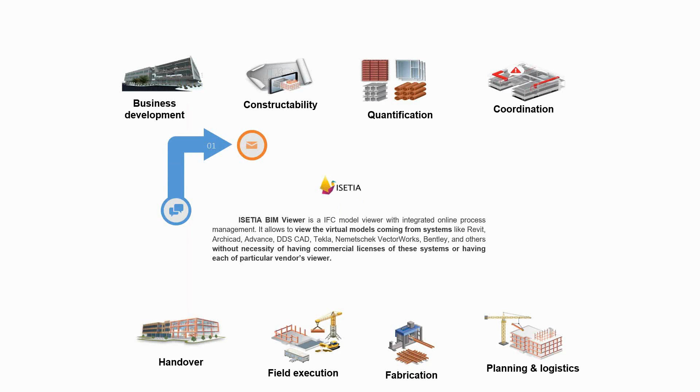One of the areas which is very fast developing in our industry is BIM. We are not a design software, but we are a project management system. That's why one of the most important things in project management is collaboration and process management. We support design processes and construction planning processes. That's why today I would like to speak about BIM and our position, how we are supporting the BIM process.

BIM is not a software. The first thing I want to mention is that BIM is a set of processes. As you know, there is a long journey for project execution, starting from business development and constructability, quantifications, coordinations and planning logistics, and of course fabrications, field execution, and handover process. Of course this is repeating all the time.

If you consider design, build, operate, this is where we are with Isetia. First of all, we are a very strong project management platform, cloud-based, allowing our project stakeholders to plan their works, execute their projects, control their projects, and operate and maintain it. But in the design case, we would like to mention that we have BIM modules.

Majorly, our focus is just giving the client an open platform with the ability to open any IFC files, 3D files, and communicate on the 3D files. First is verification, understanding the 3D files, because today we believe 3D is a very fast growing technology, and not only the designer, but also who's going to execute, who's going to do procurement, who's going to coordinate the work, needs to understand the project structures and project details.

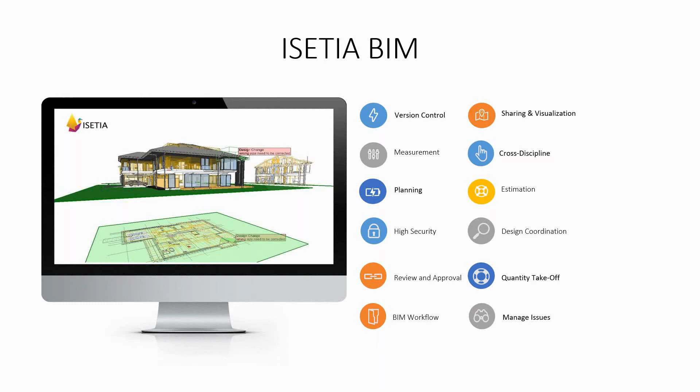The benefits of BIM - everybody's speaking about the benefits of BIM. This is already proven, and I don't think I need to repeat why BIM is important. Everyone listening to my presentation is aware of BIM's features, and many organizations have already started calling people BIM managers, BIM coordinators, and BIM is already an implemented process in many organizations.

With Isetia, we provide desktop applications for the BIM viewer, but we believe that today, without internet connection, web interface, or cloud solutions, coordination is very hard. So we give the possibility of working on the desktop while connecting to cloud systems and updating online. That's why we are very proud and flexible, providing the desktop and cloud-based solution at the same time, and you can upload and open the IFC file.

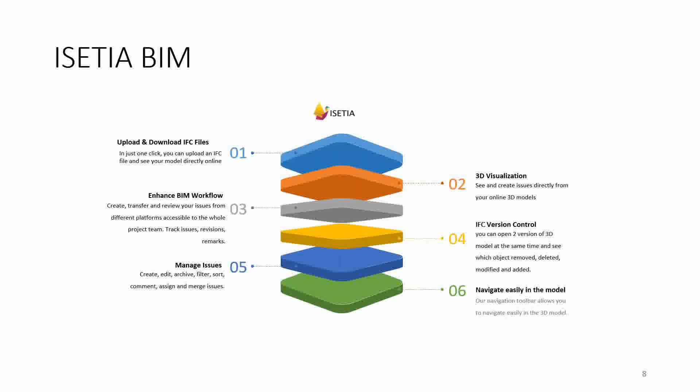Why do we give the desktop application? There are technologies available like web-based 3D viewers, but the projects we work on are very big and large, requiring big data for navigating. Unfortunately, web technology today is not strong enough, or internet connection is not good enough to cover the performance the client expects. That's why we allow the user to navigate on desktop, but at the same time collaborate on the web in the cloud. This is our way of doing it.

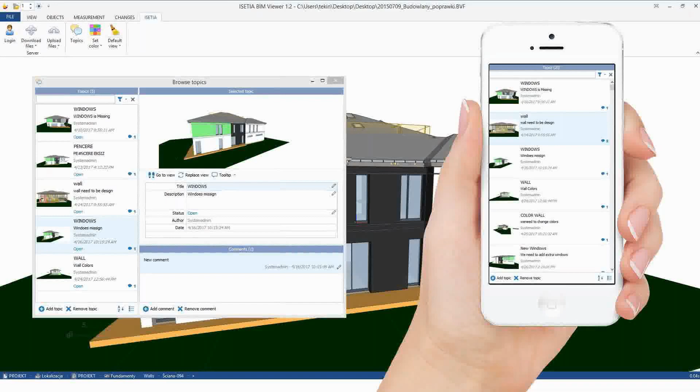In a moment I will do a live demo showing how I can create, for example, design issues. By the way, today we are speaking about design, but our support is not only for design in the BIM process - we do the same for construction and handover. From the 3D model, we give the possibility for coordination.

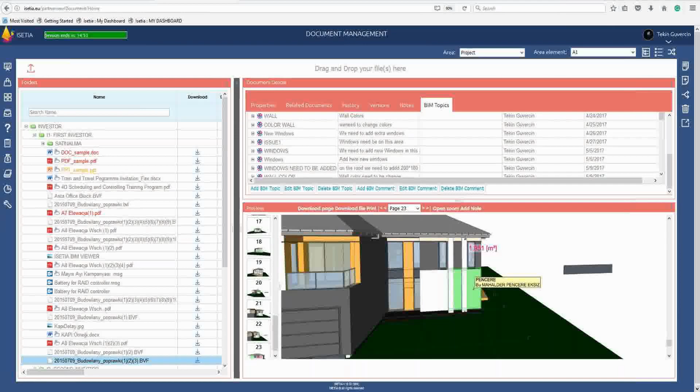This is our simple interface, and our major goal is not only giving IFC or 3D viewers - we also support any kind of documents, like Word, Excel, AutoCAD, PowerPoint, or pictures, etc. We have our own inbuilt document viewer, where the document is part of the task, part of risk processes, RFIs, and transmittals, with a very strong online markup capability. Users can navigate and open documents without changing the originals, add comments, notes, and markups, with very strong version controlling and history tracking.

We are very proud that our system supports BIM processes, but we also give clients PMI-based or agile-based methodology for project management, because we are not dedicated to one area. We would like our customers to be able to choose their methodology, so our software adapts to their way of working. That's why we are an open platform supporting any kind of methodology.

We aim to give our customers the opportunity to integrate all kinds of project processes, starting from business plan development, portfolio management, project task planning, work assignments, and processes like transmittals, submittals, and deliverables, which are important for project execution. And of course, measuring and recording risk, and lesson learned management for cost controlling.

We have very wide functionalities and areas, but I'd like to mention that in a moment, this is my last slide, and then I'm going to present a live demo. Our solution is implemented successfully and used for many mega projects by worldwide known construction companies, project owners, and design companies. We are open to developing our system in innovative ways, with support for mobile applications and web applications.

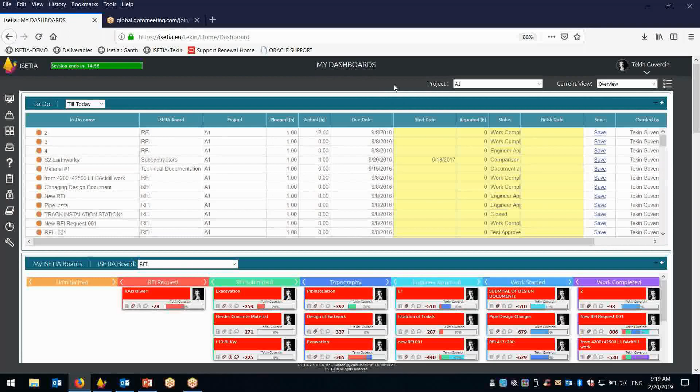We support multiple projects for portfolio purposes, so I can choose my project. Here I can see my project tasks, my project processes like RFI, transmittals, design reviews, and my tasks related to work, my risks, my issues, and documents waiting for my approval, document workflows which I created. You can also see project schedules and dashboards.

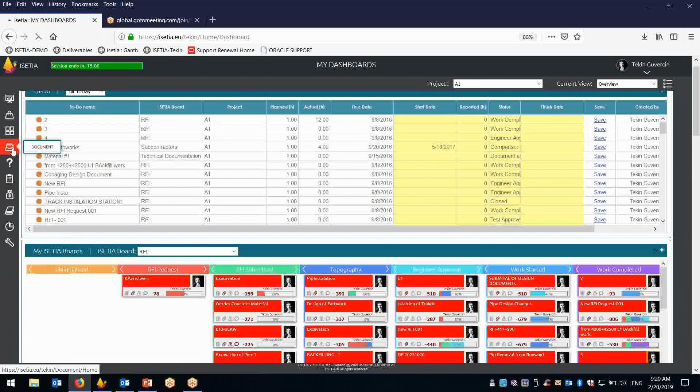On the left side we have our project modules. Today I'd like to focus on project BIM communications. As Tekin, when I selected my project called A1, I'm seeing here the project documentation. If you select a different project, the system will load different project documentation, so we are a project-based system.

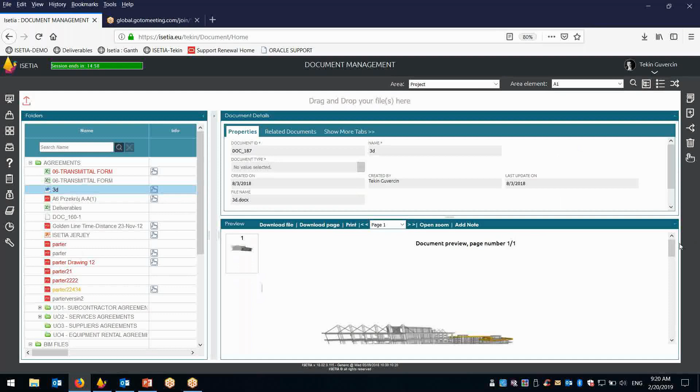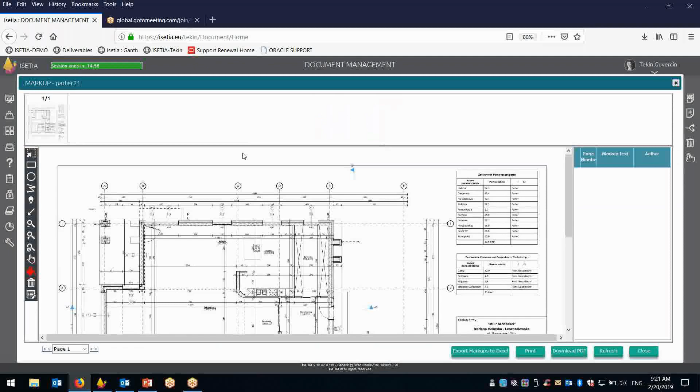Here you can open any kind of files - Word files, PDF files, AutoCAD files - and we provide an online viewer with markup possibilities. You can select the file here, and this is my file without original changes. You can make markups to edit the document. This is the classical method for 2D, and you can write notes like 'this area needs to be changed.' These markups can later be assigned to other people as a task.

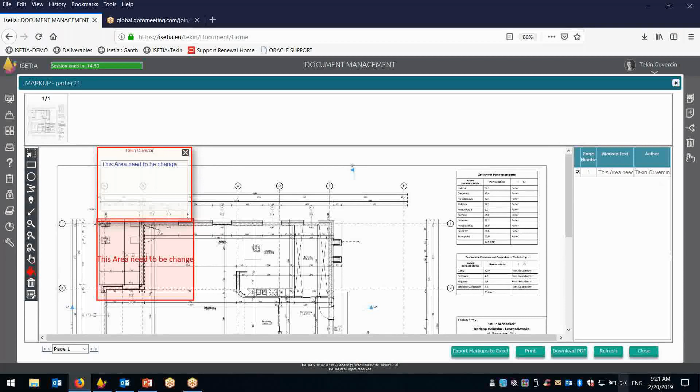When you close it without changing the original document, you can see the documents you selected. When you select the file again, you'll be able to see the markup you generated. I think I was doing markups somewhere here or here, so you can see that when you create a markup, it becomes available in the system.

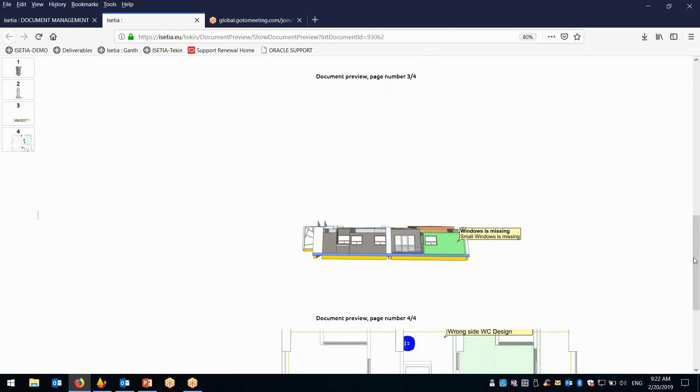But what I want to show is not the classical way - this is for BIM processes and 3D. This is the 3D file, an IFC file, which can be previewed or downloaded by the system. If you want to see bigger formats, you can see this is my project. Today I'll make samples, and you can see these are the areas where we have notes and issues. I'd like to present how we execute this process from the start. Of course, you can download the file.

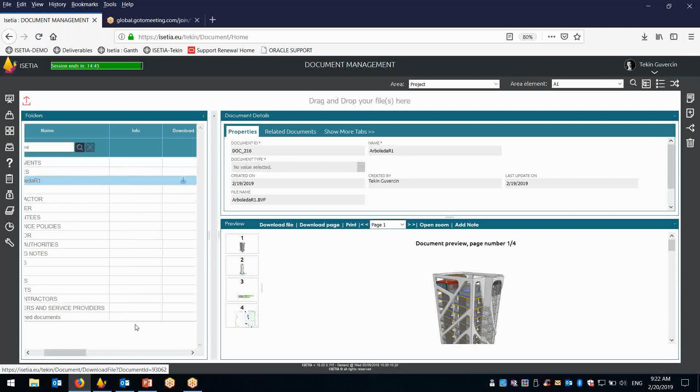We have complete version controlling, document check-in and check-out, so when you keep the original file on the cloud, any user can download it using check-in and check-out. When you select download, the file will open on your desktop with our BIM viewer - this is the project I'm going to execute today. One question: can you open the file only from the cloud? No, that's not needed.

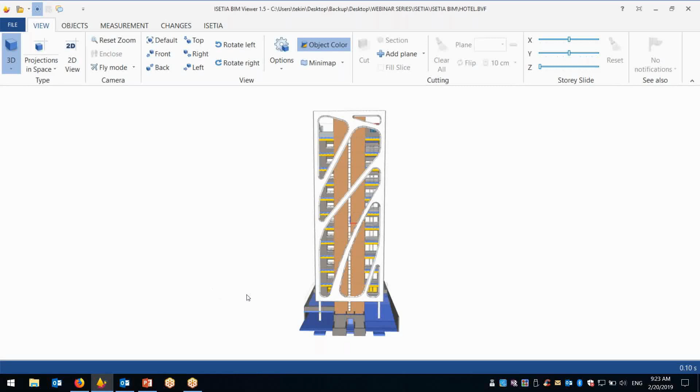You can directly open the 3D file from your desktop solutions, and then upload the file to the cloud, so that the file doesn't have to be located on the cloud as a start point.

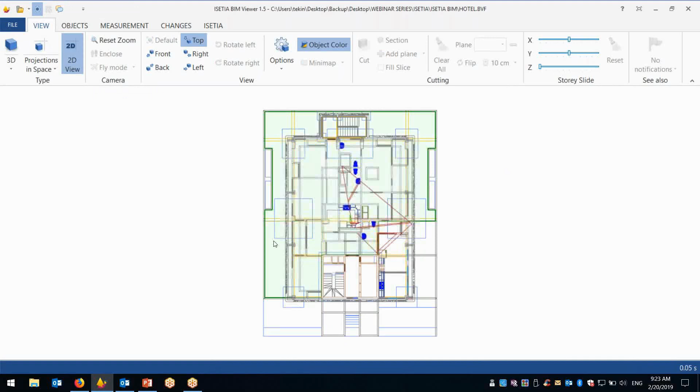This is the hotel project, which we are going to understand the navigation for today. When we open the project, we have possibilities to see it in 2 dimensions and also 3D. We can also make it, for example, for the projections with the bottom line, or we can make it left side.

You can see that we are able to see our project from the left side, or you can just select all. By this way, you can see the project from each side, how it looks. This is active too.

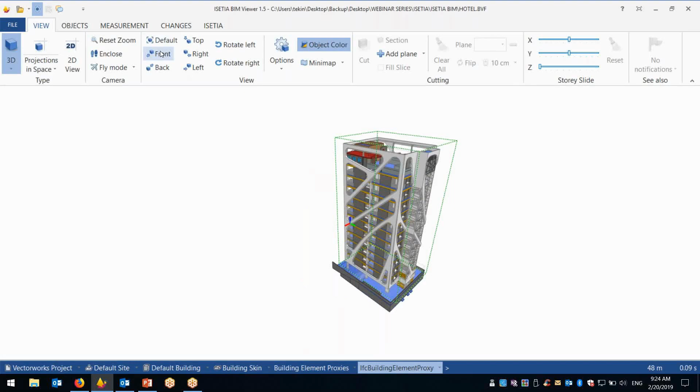You can also select the object, and you can see how it is selected in any area. We can also make it so that if you select it to view, you can see only the 2 views from the left side, right side, on the tops, and by this way you can just see the project.

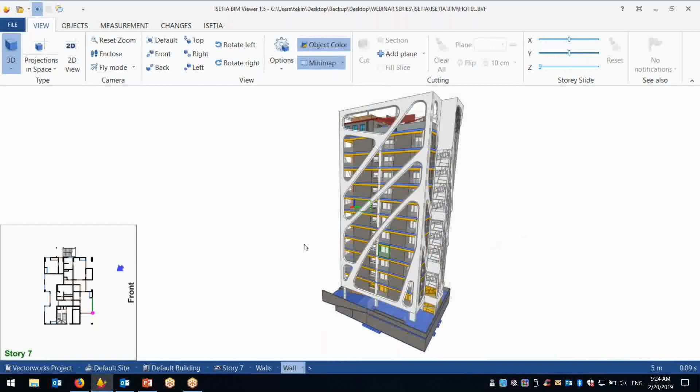Of course, if you open the minimap, you will also be seeing from which direction you are looking at your 3D, from the point of view, just showing the direction of the view, how it looks.

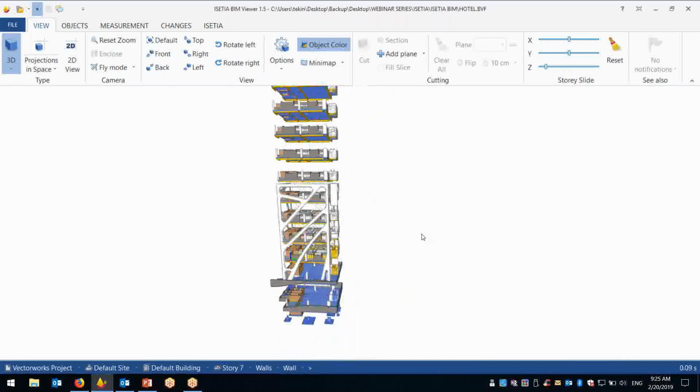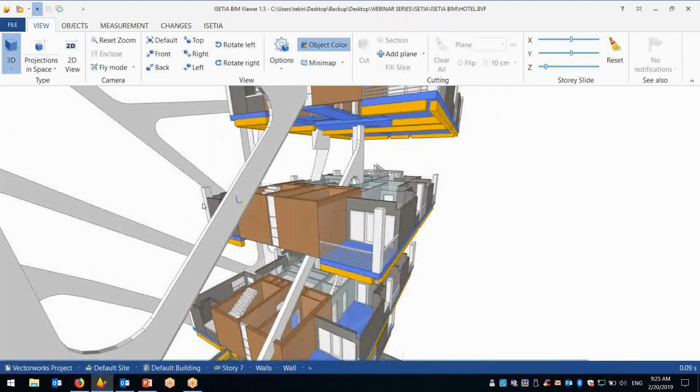One of the other possibilities is that you can also cut and slide your project. I just selected the slide by Z dimension, and you can also make it for the X dimension or Y dimension, so that you can split your project by layer for the floor levels, and it will allow you to check inside how it looks based on how the 3D is created.

You will be able to do it, and you can reset it. Of course, the colors can be changed easily.

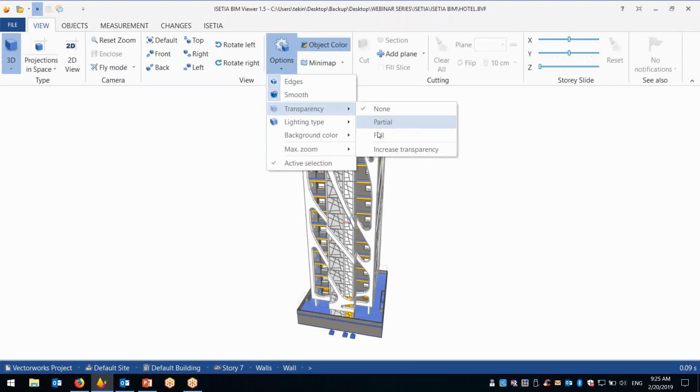You can just select the color changes, or you can go to options and make the transparent view, and you can also make it so the project is just showing the transparent view, how it looks like. It's really a powerful and graphically clear way of understanding the project.

You can select objects, and from here you will be able to select walls and all the selections, and it will help you easily understand and check manual clashes for the project.

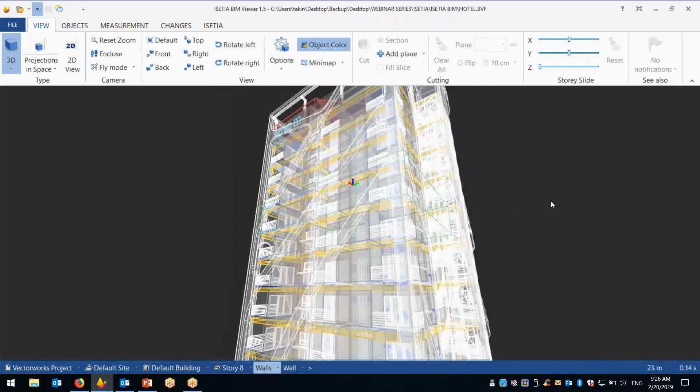Another thing is that if you don't like the white colors, you can also select the view and the color settings yourself, so that everybody can use their preferred colors from the system.

I generally like to have dark colors, so I just move to dark colors, and you can also use the other options here.

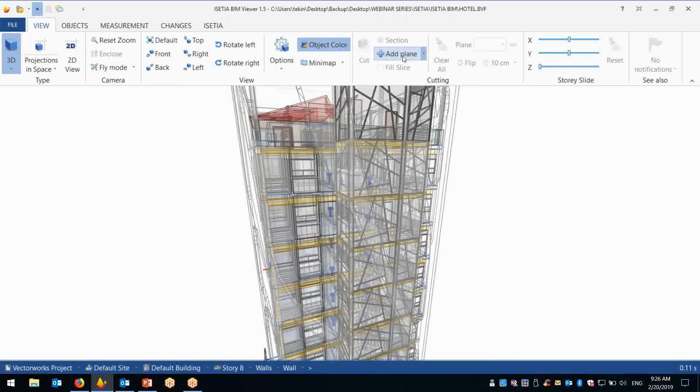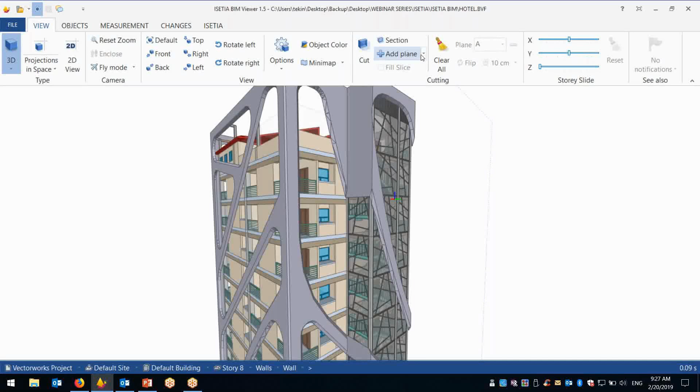One of the other possibilities is that you can cut the object from any area you wish, so you have the possibility of cutting the object from, for example, here I would like to select the cutting for the edge. You can select the objects, and you can cut it from one side.

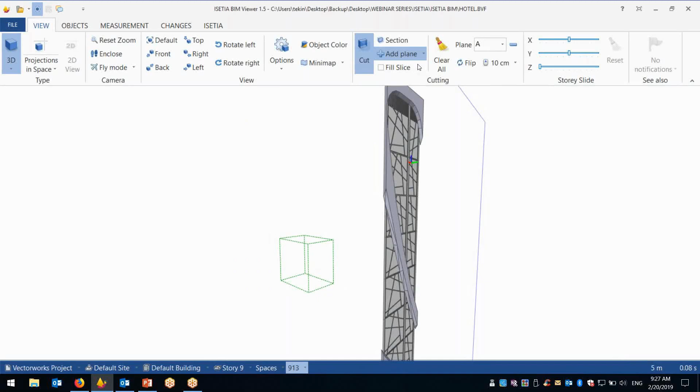Or you can make it, for example, here, cutting from the Y-axis or X-axis, or that kind of thing. It easily gives you understanding of your project's systems.

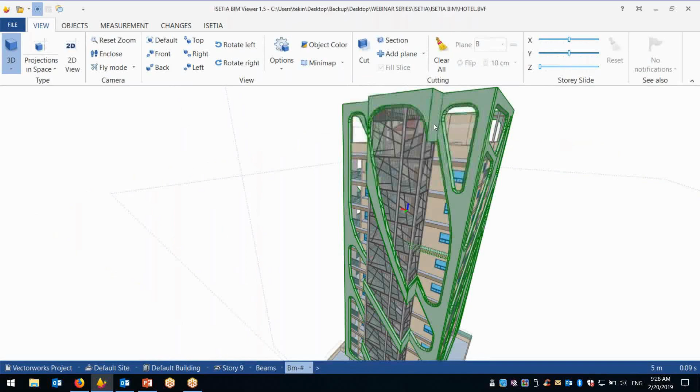Of course, we can send you a download link, and you can just select and cut the objects in any area which you would like to, and you can test it on your system. This is for easy navigation.

And what does it mean? Anybody on your projects can install the viewer free of charge, and by this way you can navigate it. We are not charging for this. We give our customers free of charge access, and after the webinars you can contact our regional managers, and we can provide a download link so you can immediately start using the system.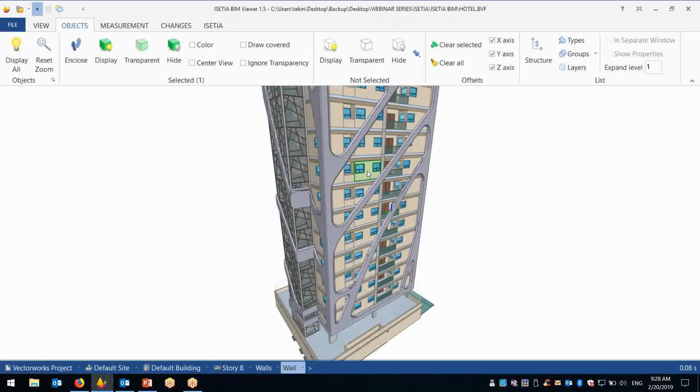We also have, in the standard functions, more navigation possibilities, which is that you can select the object and hide all the rest, and look at just the selected items.

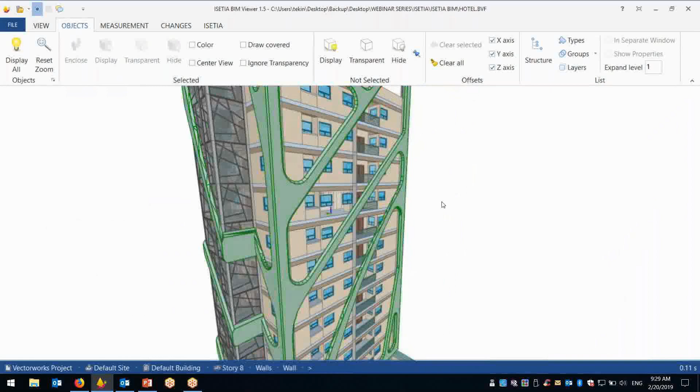Or you can select and hide the wall or display, or make a transparency for all the rest, so that you can see only the selected items. It's a really impressive way of understanding today's project with the extra dimensions.

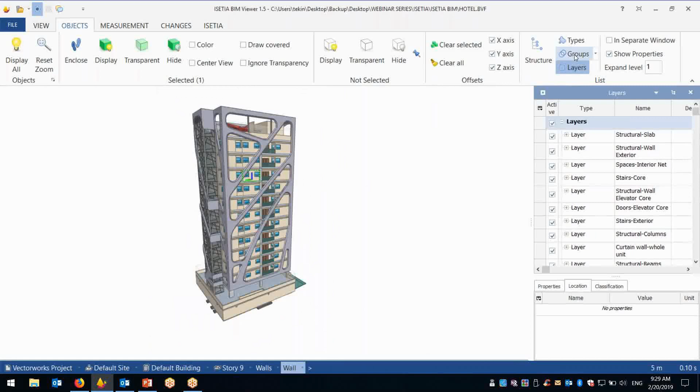And we can also open the project structures, which means that if you would like to see, for example, a group of works and type of works in the project, if you want to see only slabs, you can see the project slabs.

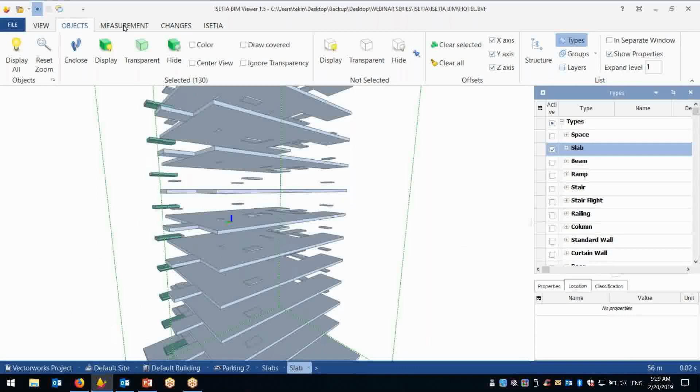Imagine that if you would like to make quantity calculation, just one click, I can tell you how much concrete is going to be in this project with the measurement modes. We can also select multiple lines, so these are the beams and slabs together. You can also make some clash checks to understand if anything is wrong, because when you put the columns, you can see the structures of the project, and from here you can understand how your project shell is going to be.

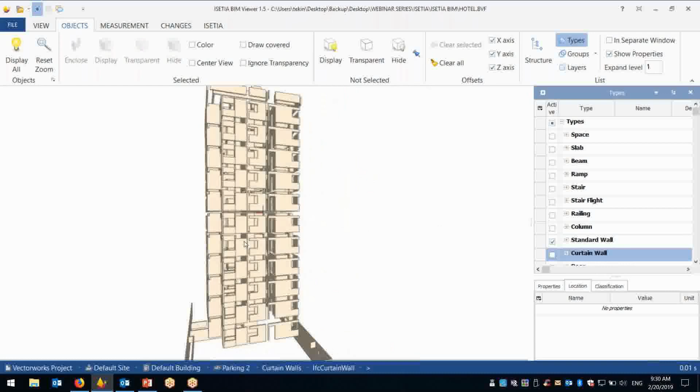You can just select any items, any floors, and if you selected all of them, it will be available for all of them. If you just want to select only the walls, the system will just show the walls and standard walls, etc. So you can easily navigate your project 3D file with our system.

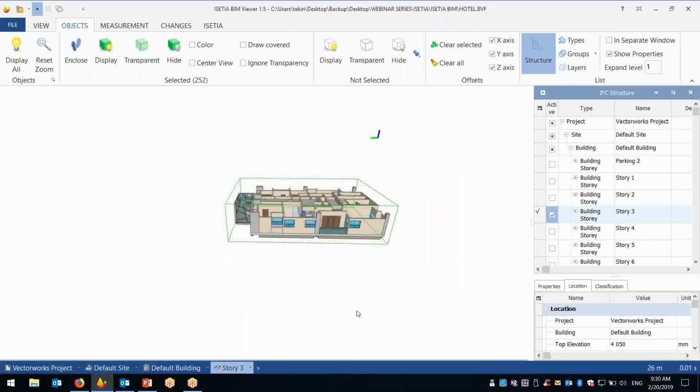Of course, for the structures, you can just select only the selected floors. This is the third floor, and you can open it and see how the third floor is going to be built. From here you can see how the 2D floor plan is going to look, or in the 3D you can just select it. If you want to select multiple floors, like the third floor and the sixth floor, you can see that it's also possible to make a comparison between the two floors.

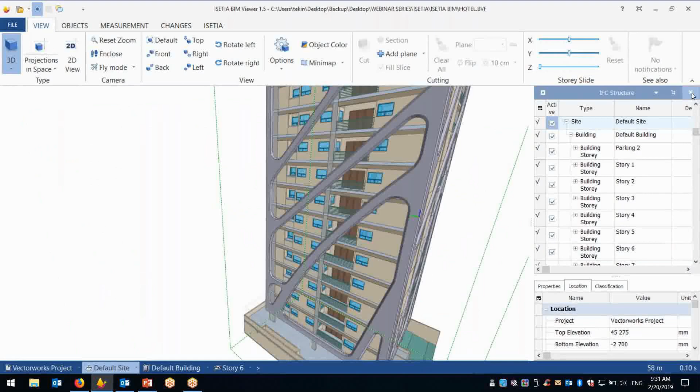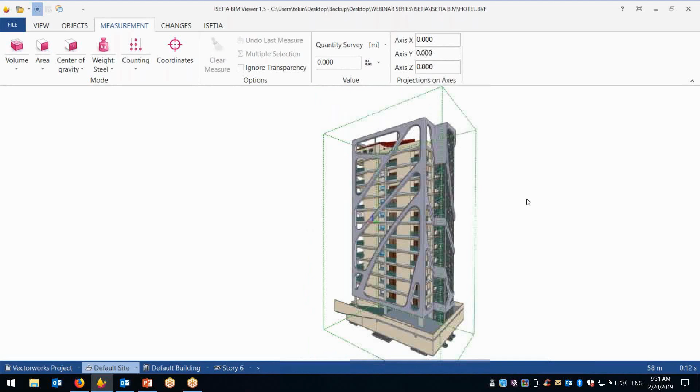All right, what is next? We also have the possibility of measurements. This is your 3D file, and your procurement manager, your cost estimator, your planners may need to estimate the work quantity, so you can use the 3D file for that.

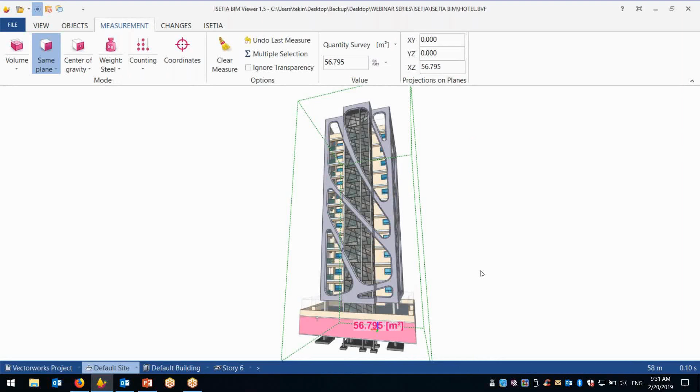For example, from the selection area, you can just select an object. You can see we are going to have 56 square meters of walls, or from this perspective, 62. Multiple selection is available, so using control you can select 56 plus this direction 118 plus this one and this one. The total wall is 160 in this area, and you can come back here, and when you select these areas also, the system will give the total, 257 square meters of wall work is here.

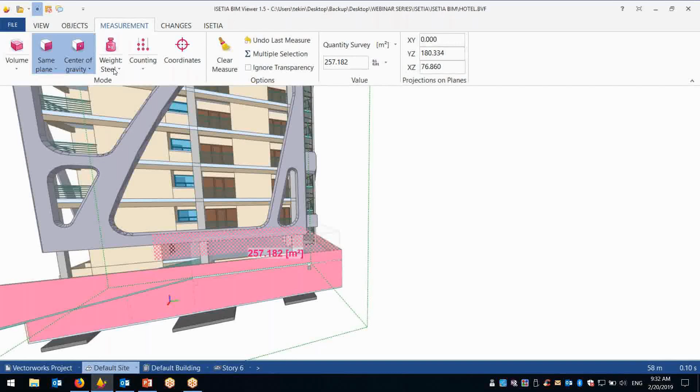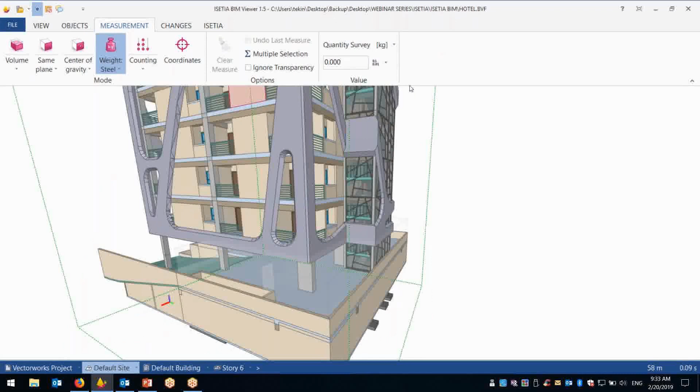Of course, you can count it, measure it, select it, for example across many areas. We have the possibility of selecting quantity of work for how much is required per cubic meter, for steel, and you will be able to figure out basic quantity estimation from the system. We are not fully specialized in quantity estimation, and there are professional software like CostOS and other systems, but we just want to give a basic understanding of the quantity of work through the system.

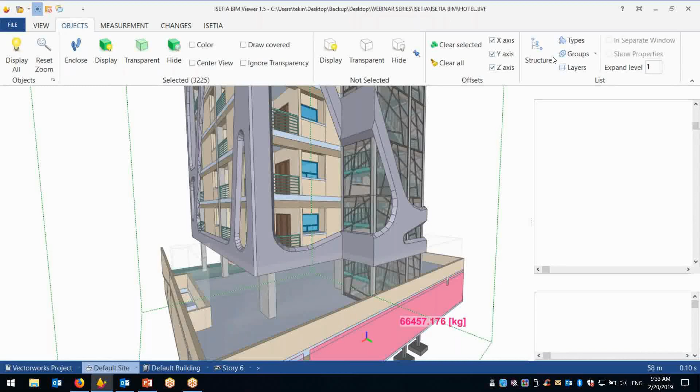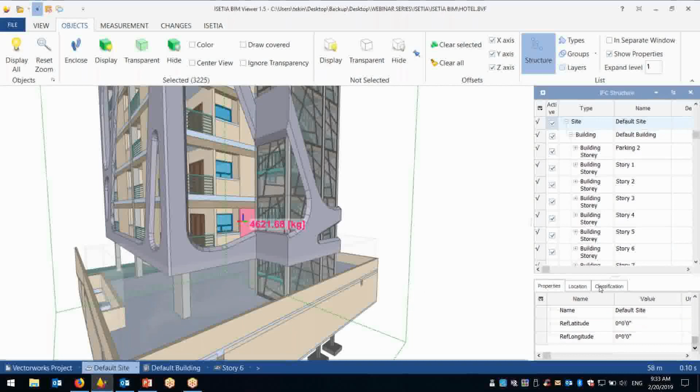Of course, the quality of the 3D is also important, because when you select an area, you can also see the properties of the work: the top elevation, bottom elevation, global top elevation, all the details of the work will be here. You can see this by selecting the work, so you have details of the quantities, properties. This is the element, this is the location, this is the classification — all the data is going to be available in our system.

What is design coordination? Actually, until now what I showed were simple BIM viewers, 3D viewers, IFC viewers. But our idea is that we would like to make design coordination possible by giving notes and remarks for the 3D. So what we need to do now — number one, you can see that in Isetia we are now connected to our cloud server, and I would like to create some topics.

I open the topics area. At the moment there is no remark and no topics, so I would like to create a new topic. Let's say we select this wall — this is the wall which I am going to select. And in this wall, first of all, you can just change the colors.

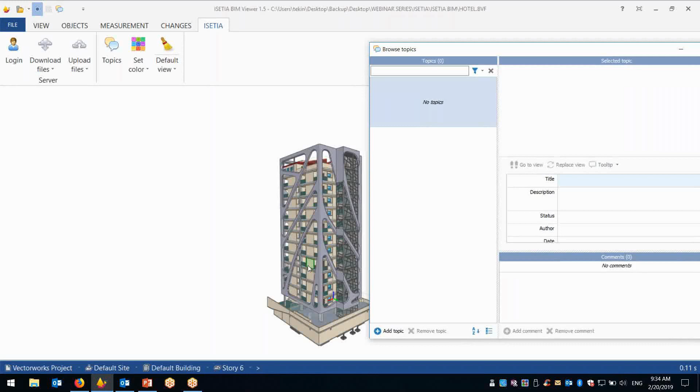Let's make it red — it will be visible. And I can create a topic on this selected object. You can see that the system immediately takes the picture. The topic says 'Windows missing,' and for the description we can write: we need to add new windows here.

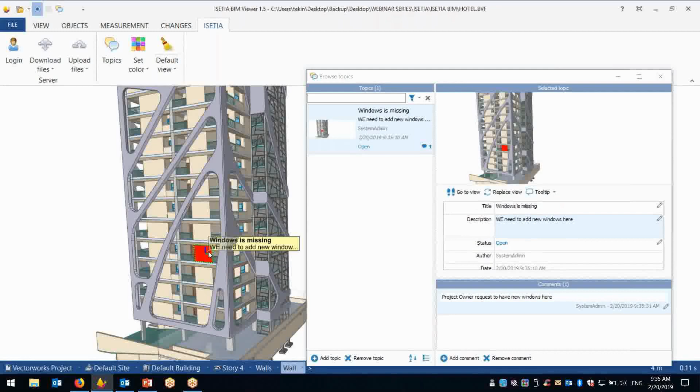And for comments, we can write: project owner requests to have new windows here. So I write all the information, and I would like to put this as a note as well, and then close it, so that wherever I go now, I'm going to have these comments, even the directions, how it looks — it's available from this view.

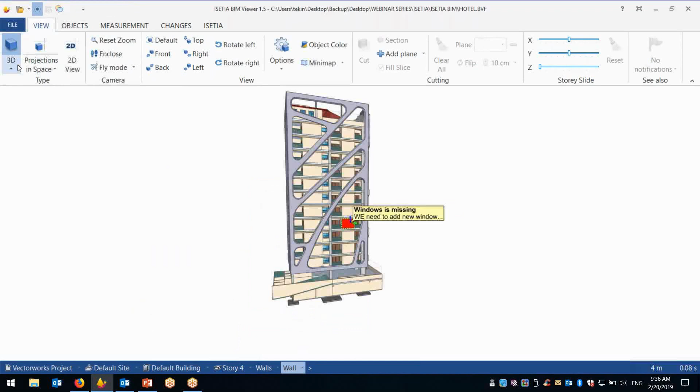Even if I go to 2-dimension, you can see that all the comments are available here. In the topics area, when I open it, I can also replace the view, and now this view is here. We would like to make another comment, so you can select it here, another wall, and make the color the reds.

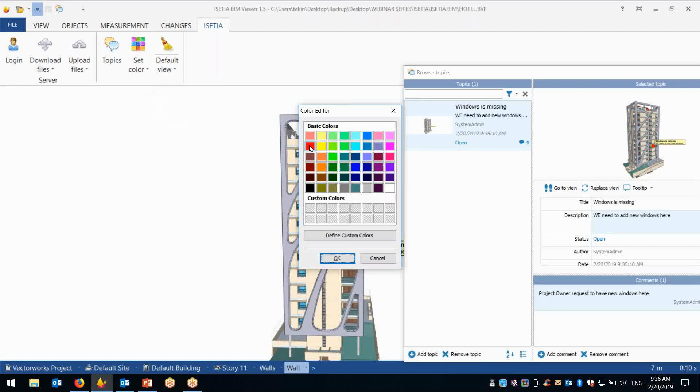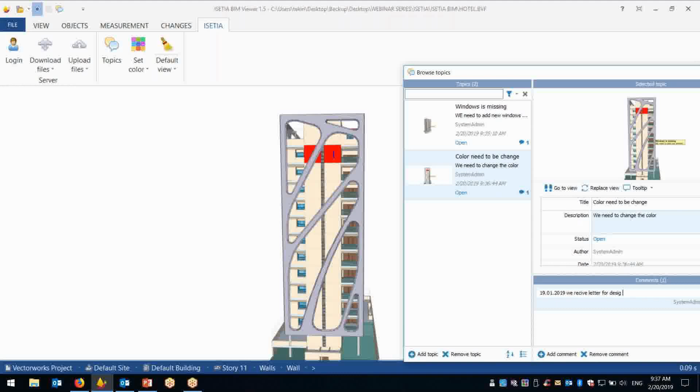Adding the new topics, let's say the topic items need to be changed, you can write it, we need to change the color. And you can add it here: 19/01/2019 we receive letter for design change. So you can just put the notes here.

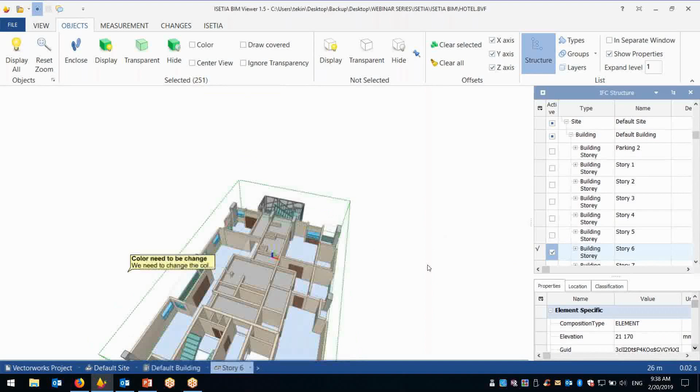You can see that now I have another note. Of course, it's not only the 3D views, you can also go to, for example, the 2D views. By the way, we can do it this way. You can go to objects or structures, and from here select it, for example Story 6. Now in the Story 6 you just see 2 dimensions.

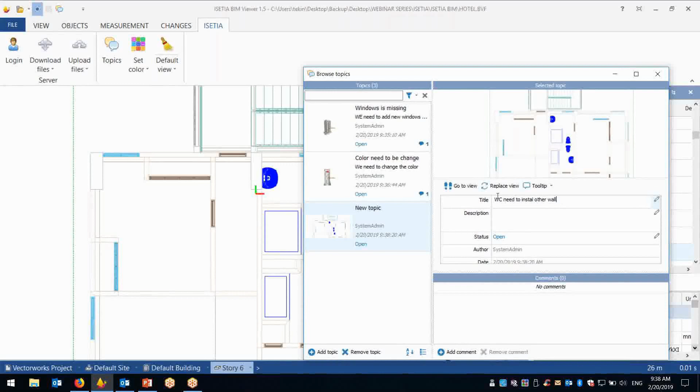From here you can also make another comment and new topic, and say we need to install other wall. So you just select it here, and select object here, and description: we need to install a different wall. I think it's enough.

I created it as a system admin because I logged in as a system admin, and then I created three comments. Consider it, you have 100 people in your project, everybody can give their comments, and you can also have comments and topics on separated items.

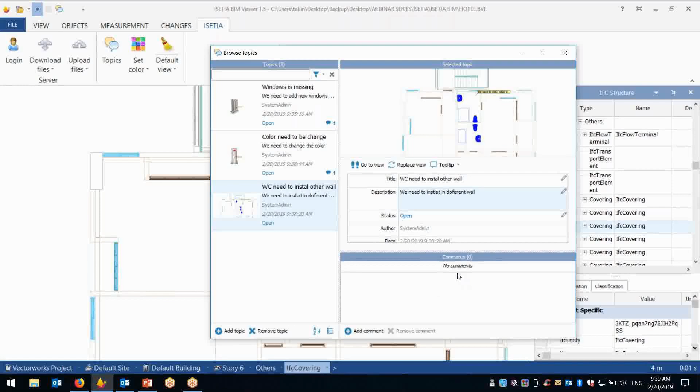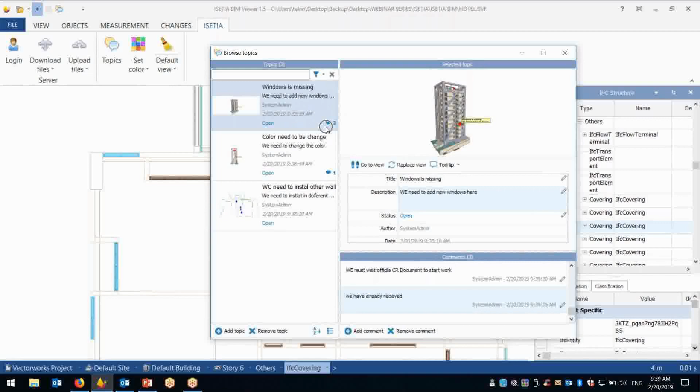For example, another person can come as a system admin, I log in, and another person can say that we must wait for official change request documents to start work. And another person can say that we have already received it. So you can comment it for multiple comments. You can see that there are 3 comments available here and 1 comment available here.

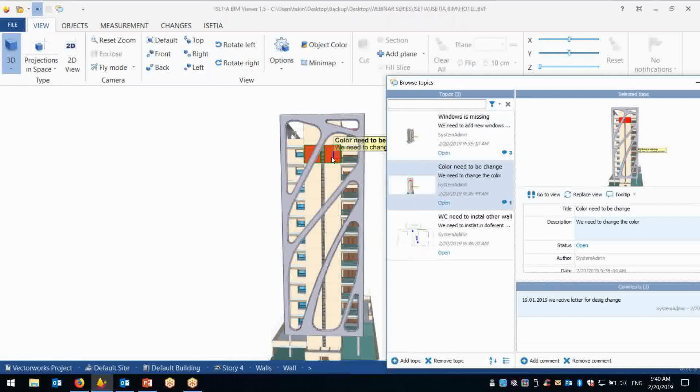One question: if there will be too many comments, too many remarks, how to navigate it easily? First of all, you can see that when you select the comments and select 'go to view', the system immediately goes to the view which we have. This is the second view, go to view. You can just go to view from here easily, immediately you can see it.

Another question: is this only for registration? No, you can see that we have status items, and status items that you can assign as open issues, in progress, close, or reopen, and you can follow up to track the status of the comments.

How can we connect with other users from the desktop? Very good question, let me show you how it is. Actually, I'm working in my environment now, and when I go to here and Isetia, I can upload my comments, or I can upload my files.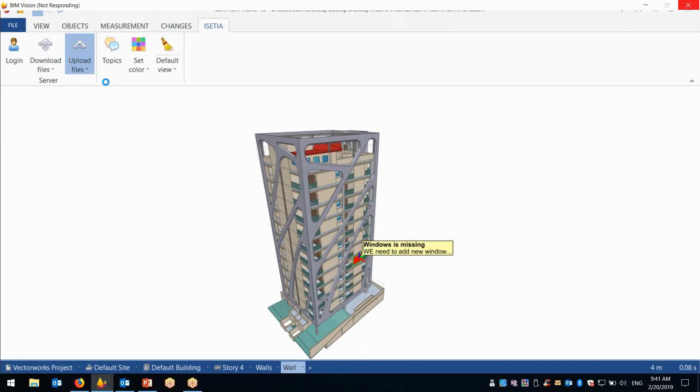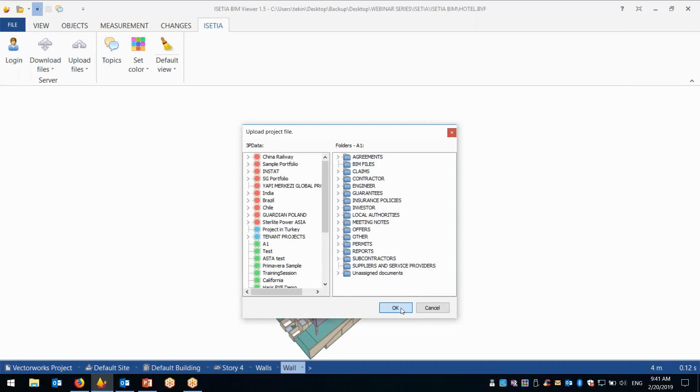It is possible that when you register your comments or your data, you will be able to select it and upload with options. When you select this system, first of all, I'm uploading for the first time, that's why it gives me this project structure. Select the projects, this is the project structure files in the BIM files. When you select it, the system is now uploading the project files and project comments.

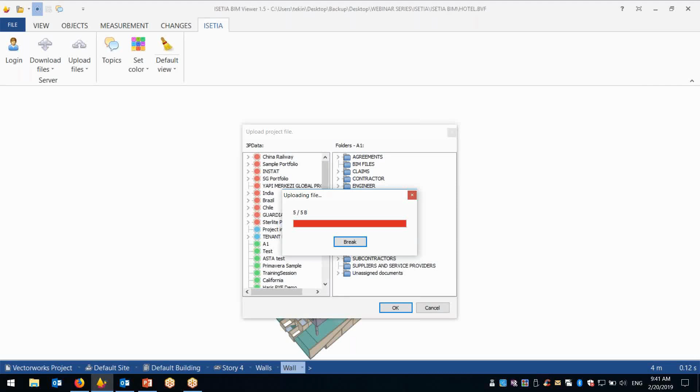But as I mentioned, you can easily send it in the comments. If you download it from the cloud, you don't have to upload the file again because the file is located in your cloud, so we just send the file. By the way, please be aware the performance at the moment is very fast, even though this is a big IFC file I'm using and uploading.

So let's go to here, from here to our Isetia cloud, and now I'm logging into our Isetia cloud, and from here we will see how it looks in our web portal. I go to the documents area. By the way, it's 15 minutes, the system is logging out, that's why I log out now.

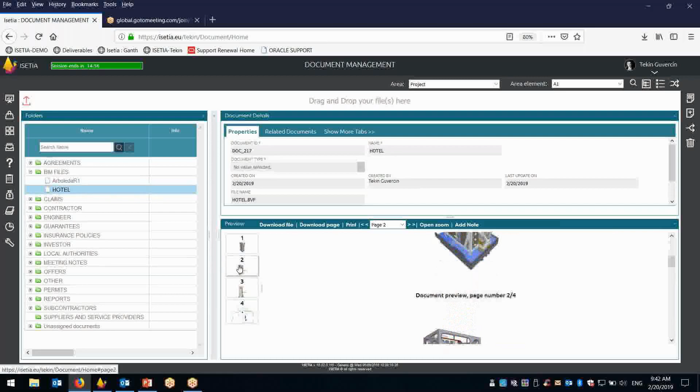I located the file called under the BIM files, it was in the hotel. Now you can see these are my comments: windows is missing, and here windows is missing. And here you can see we need to add new window. So what are the topics? The BIM topics are here.

Windows is missing, you can see project owner requested, so here my comment says we must clarify it. So when you select the topics you will immediately see which topic you are in, and you can add your comments, edit the topics, delete the topics, add BIM comments, communicate here, assign this to someone as a task, and track the status of the work. You can have all the communications at the moment in the web portal, which you started inside here.

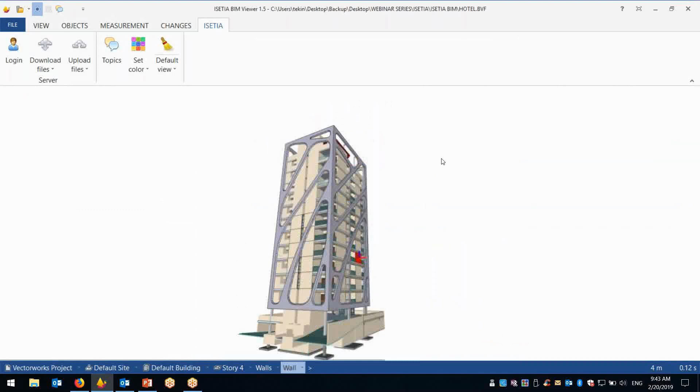Is there any question?

The question is, what about if the design document changes? Good question. We have version control. This means that when there are any changes on the 3D file, you can upload it as a new version - version 1, version 2, version 3 - and for each version you can keep track of different comments and issues.

We also have history log tracking, showing when a file is created and so on. You can also add notes on the 3D file as a tag, saying for example that this is not the final version, and do not distribute it.

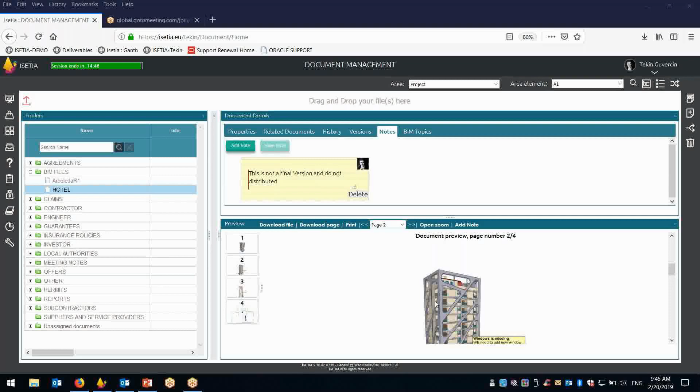The question is, do we need to re-upload the file to see updated comments? No, we don't have to, because everything is kept in the central database. Whenever anybody gives file comments, it will be available here as a new item, so you can see how many uploaded files there are. If another person adds more, the count increases. But when you change the status to solved, once someone downloads the file, they will see it shown as solved and completed work.

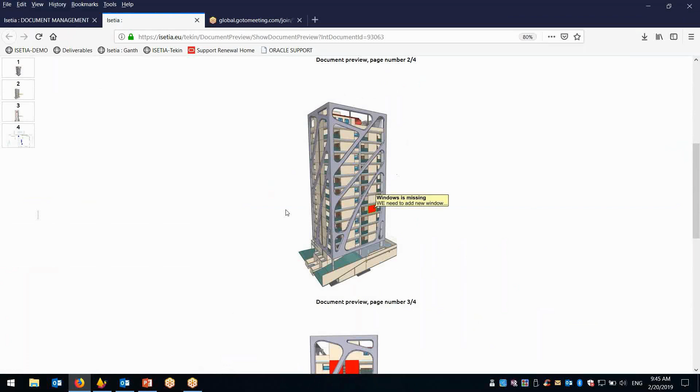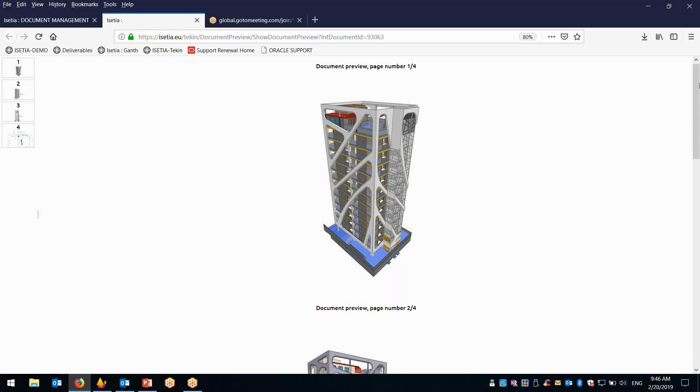If you want to see a bigger view, you can open full screen and see everything without any installation. We use very smart technology for performance - we get snapshots of the project 3D file and preview them as project snapshots. This way, even if your file is very large, big projects, you won't have any performance issues. This is the smart technology we use.

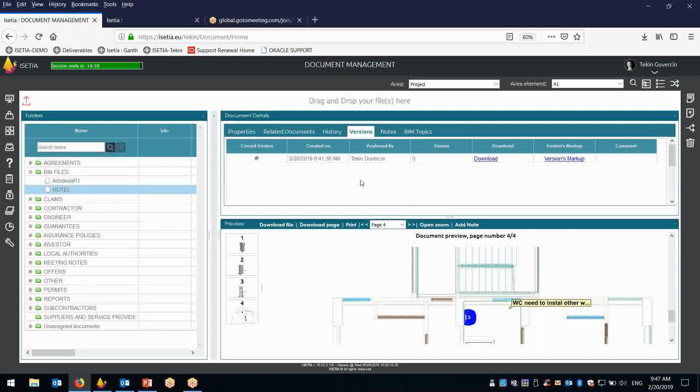There's one question - can we compare versions? Yes, we have two kinds of version control comparison. When you create a new version, you can compare two versions side by side, version 1 and version 2, to see how many remarks were in each. This is the classical viewer-based version control comparison.

Let me close this hotel project and show you another example - you can open two IFC files at the same time. So you can open this IFC file, which is another project, and this is 3D file 1. If you go to changes, you can also open a second one.

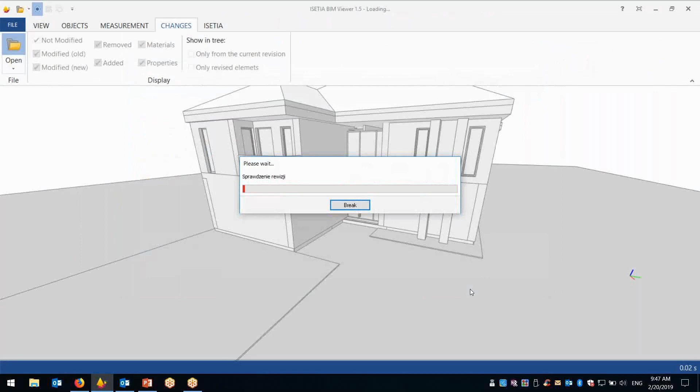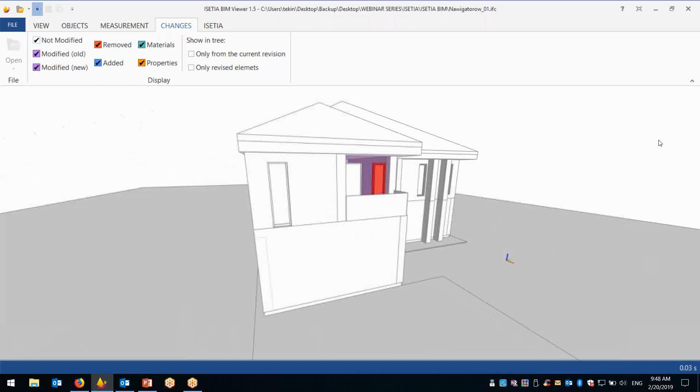When you open the second file, you can see version control in action: red shows an object that was removed, blue shows an object that was added, and white shows objects that are not modified. So on the purple area we show modified and changed items, and what the new added items are. For example, the red one is removed - there was a window here that's gone. And here you can see a window moved 15 centimeters to the right. You can easily see the difference between version 1 and 2 - it's an excellent way of comparing two different IFC files.

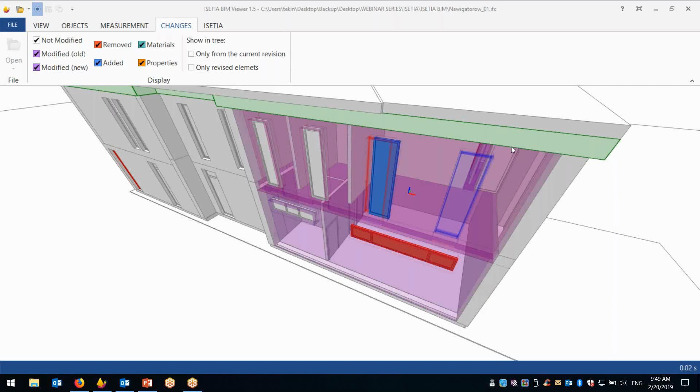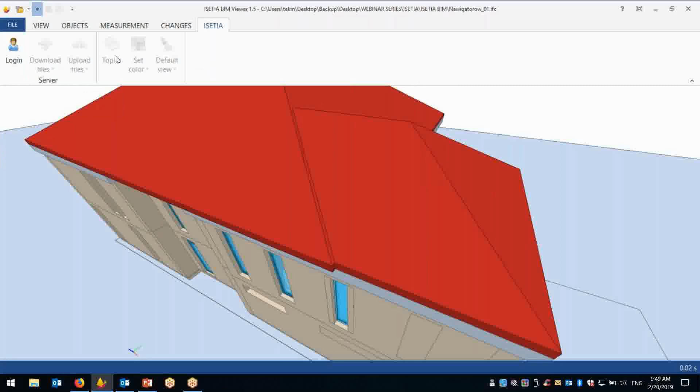If you don't have any questions, thank you very much for your time. If you're interested in more details or want to install our IFC viewer, just contact our local partners or regional managers and we'll provide a download link so you can start using it immediately. There's no time limit - this is the full license. The only difference between the professional version and the standard version is that in the free version certain functions aren't available, such as connecting to the cloud, but on desktop you can open any IFC file and navigate it freely, using it as much as you want, free of charge for our customers.